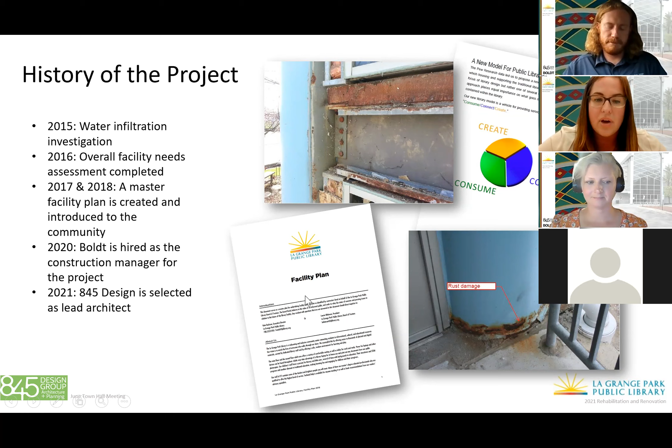Just to give a brief overview of the first steps in our design process: we were in a position where we had all this great information done by previous firms and previous architects, but we needed to dig a little deeper and do our own due diligence. So one of the things we did in the beginning phases was an information gathering phase, and these are just the simple parameters.

Some of you may have seen the survey issued earlier this year. We conducted surveys with patrons, staff, and community partners, and we also conducted interviews with the board of directors, the facilities team for the library, each department head, patrons, as well as other adjacent groups to the library, like Friends of the Library and Interfaith.

We had a great response to the surveys, over 200 patron responses, which is excellent. And we really learned a lot through the surveys, as well as the interviews that we conducted with everyone.

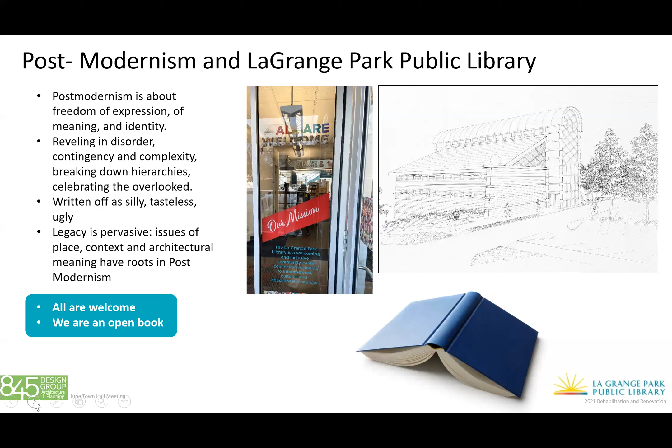And also keeping in mind that, while the style may not be popular, it might not be everybody's favorite, it is an important style in architectural history, and the building will actually be eligible for landmark status in about 18 years. So the design approach is fixing the repairs and also enhancing the character that exists within the building, making it a really beautiful example of postmodern architecture.

So with that, we started looking at the materials to be used to repair the building. We did a lot of research. The system currently failing on the building—that light yellowish-green color you see—is called EIFS, Exterior Insulation Finish System. It's a very cost-effective, economical product that erupted in the 1980s and was the original product specified for the building. It's still used today.

However, the technology and application of that material is vastly different than it was in the 80s. It's a much better system today, and the most important part is that systems today installed using EIFS are drainable, meaning if water gets behind the product, there's a way for it to get out. That's really the challenge with the building right now—the water can't get out, so it's getting trapped behind that material and causing problems.

So we're looking at a drainable EIFS system, and we also looked at a metal panel system. At a high level, cost-wise, a metal panel system is double the cost of EIFS. The other thing is that the EIFS system is a complete system that gets warrantied—the exterior material, the insulation, the air barrier—it's all applied and has a single warranty as a system.

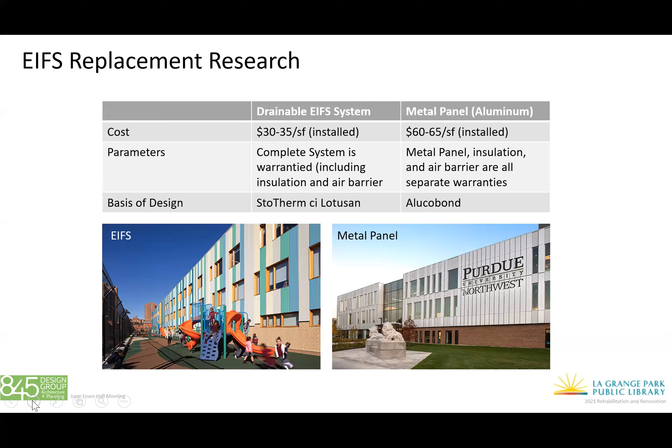Whereas if we were to go to another system like metal panel, you've got the warranty for metal panel, the warranty for the insulation, the warranty for the air barrier—they're all separate and much more difficult to track down if there's ever an issue. With both materials, there's really a wide range of aesthetic opportunities, but right now the design team is leaning towards a drainable EIFS system for the replacement of those walls.

Now I'm going to go through the building elevation by elevation, starting with the east elevation and the scope of work for this side of the building. This is the elevation that faces Memorial Park, and it's the one that started it all.

This one is in the worst shape as far as water entering the building. So what we would do is remove all of the EIFS wall system and replace it with the more modern, drainable EIFS system that I mentioned.

Also, all of the glazing in the curtain wall, the barrel vault - that's the tall glazing you see in the center of the library, forming the spine of the book, if you will. We would remove all of that, including the mullions, which are the pieces of metal that divide the panes of glass. That's all one system that needs to be removed.

Additionally, the ribbon windows - those are the windows on the EIFS wall flanking the barrel vault. Most people know them because they're the blue framed windows. Those would get replaced as part of this project as well.

We would also have a new entry door to the patio space, and add new insulation and column covers at the blue columns.

These are the two large columns you see in the photograph below, flanking the barrel vault. In further photographs you'll see some corrosion and rust at the base of them that we need to address now so there's no further damage, as well as insulate them to help alleviate some of the water issues we're having in the building.

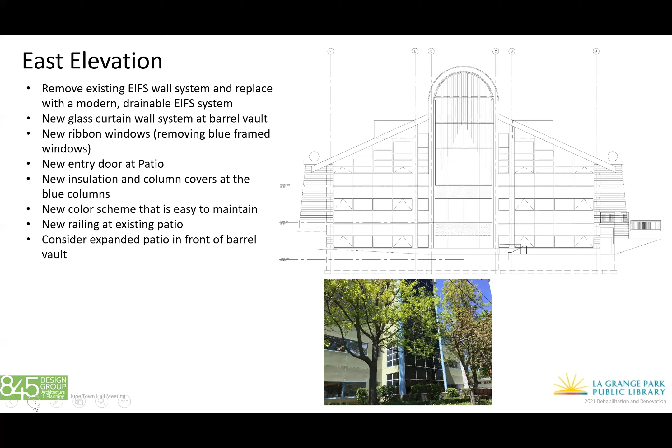We would also add a new railing at the existing patio to soften that space and update it, and possibly consider expanding that patio to be in front of the barrel vault, near where that photograph is taken. There are some beautiful park benches there right now under some trees, but there's really no paved area, just grass, so potentially expanding that space.

Moving to the next slide - on the north elevation, we would remove the EIFS system, mostly on the clerestory part of the building, which are those windows up high where you see the diamond shapes. So we would remove that and replace that system.

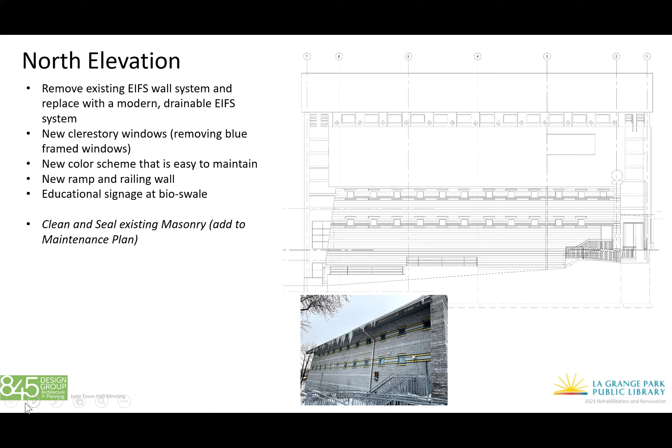We would also remove the clerestory windows themselves, which again have the blue window frames, so those would come out and be replaced. We'd also have the new color scheme tying everything together, as well as a new ramp and railing wall. Something else we're looking at is educational signage at the bioswale on this elevation.

On the south elevation, it's very much the same, where we would replace the clerestory windows and the EIFS system as well.

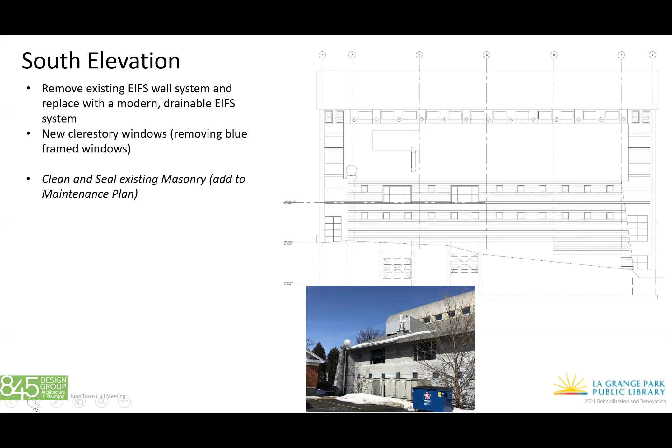Our findings on the masonry, which is the gray block you see where the little square windows are on the north and south side - we would really just clean and seal that masonry. It's in good shape, and it's more of a maintenance item than a full replacement needed for that component of the building.

And then we get to the west elevation, which is the first impression of the library. On this elevation, we're looking again at replacing the barrel vault glazing in the middle, and addressing the canopy. The canopy will need to be removed to replace the EIFS anyway, but it's also an opportunity for us to really create a welcoming first impression for the library.

We would also, at the blue columns here, insulate and reclad those so they're more durable and will last longer. We're exploring opportunities for a new book drop location as well.

Right now, the book drop is on the very front of the building. We're really just trying to declutter this front of the building and make it more welcoming and easy to access as you enter the space.

In order to protect the structure, most of the corrosion we're seeing is at this location, at the front door, at the bottom of those blue columns. That's common when things like road salt eat away at the steel. So we would want to introduce a planter to protect the bottom of those columns so that further damage doesn't occur.

With that, we would tie that into the new ramp and railing system that we had mentioned. The current system has evidence it needs some maintenance and repair. It's also failing in some areas too, so we would want to look at that as part of this.

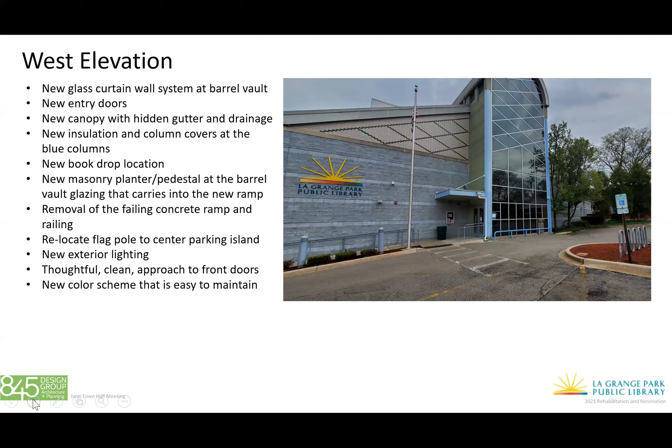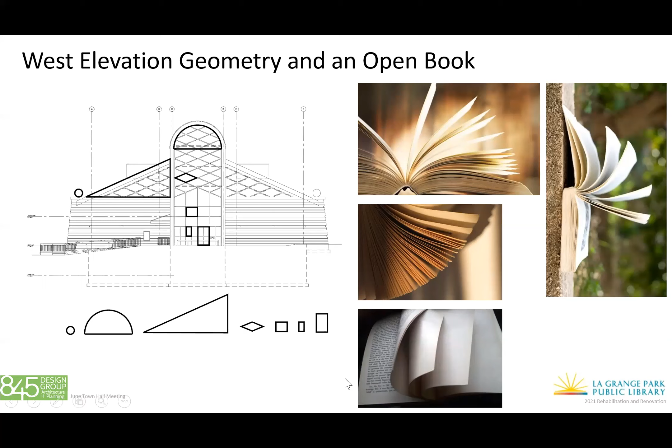Where we're literally taking a curled book page and turning it into the new front canopy for the library.

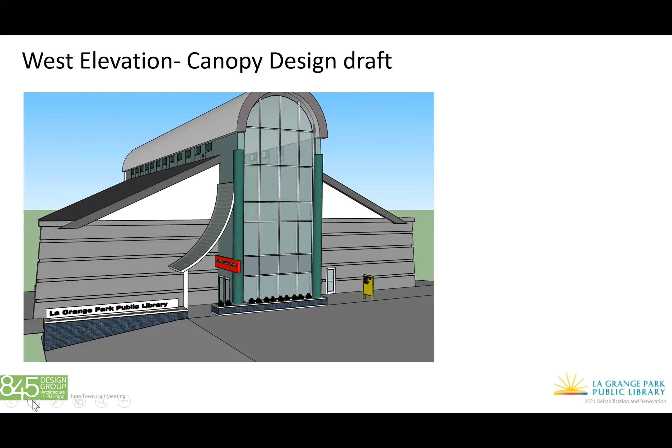One of the things we're also looking at as we're designing this front canopy and thinking about the flow of the building and how people are going to access it is the exterior color palette. So we have a couple of constants within the building that are going to remain, and we have some opportunities for change with some of the materials that need to be replaced.

On the left-hand side of the screen, you'll see we do have the gray bricks that are remaining, as well as the green and yellow glazed block that we have. At the west elevation, we've got the green and gray glazed brick that forms the diamond pattern on the front of the building. Then we've got the roofing, the barrel vault roofing, the low slope roofing, all of that would remain.

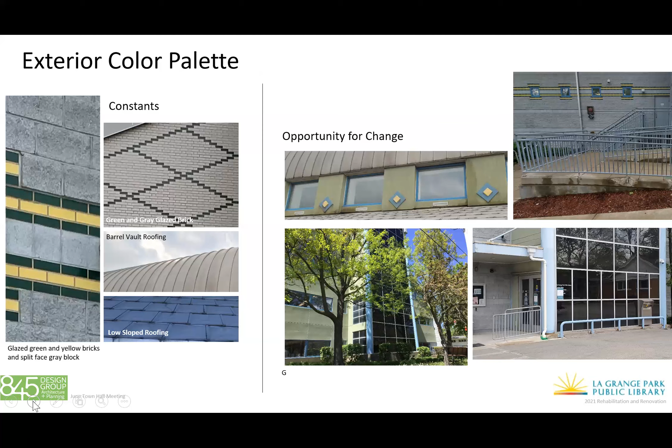On the right-hand side, we've got what we're calling opportunities for change. A lot of this is materials that need to be replaced because they're failing or aging, or they're prohibiting work from being done on things that need to be repaired. So we've got the clerestory windows, the EIFS up at the clerestory level. We've got the ramp on the north elevation where you can see chunks of concrete missing out of it. We've got the east elevation, where most everybody knows that's where most of the problems are with water infiltration, and some corrosion happening at the front elevation on the west side. So all of those are opportunities for us to make a change with the building as we consider the enclosure repairs.

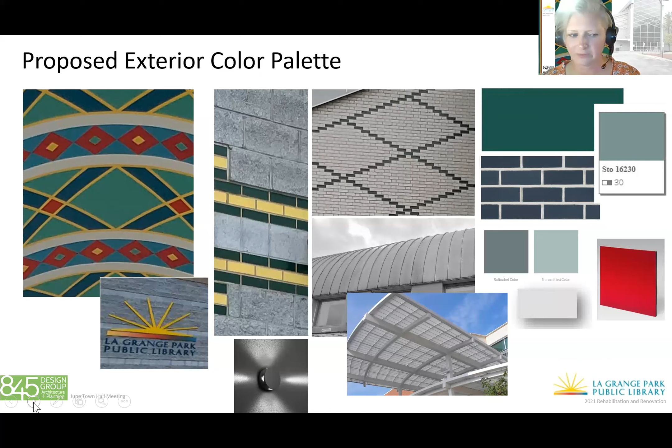Great, I'm going to turn it back over to Kate, and I'm happy to answer any questions at the end of the presentation. Thank you so much, Megan.

It's great to hear all the exciting things we have in store for our future. But first, I want to go over what I think is a pretty burning question in the community, and that is how we are going to finance the project. A question that's been asked quite a bit so far is, will there be a referendum? So I am here to answer that question.

If you haven't seen it on our website already under the FAQs, the library board has not chosen to go to referendum for funding. We've spent the last several years cutting costs from our budget and saving as much money as possible, so that we are now at a point where we have over $1.5 million in our capital project fund. This money can be used for future building improvements and is a considerable amount, but it's not quite enough to finance this entire project.

To help determine our best options for financing the project, the library worked with Meristem Financial Advisors, who specialize in library finance and have a long history of successful bond issuance. Based on our current funding status, we are able to borrow the remaining funds needed to complete the project and repay the bonds at a low interest rate over a period of years.